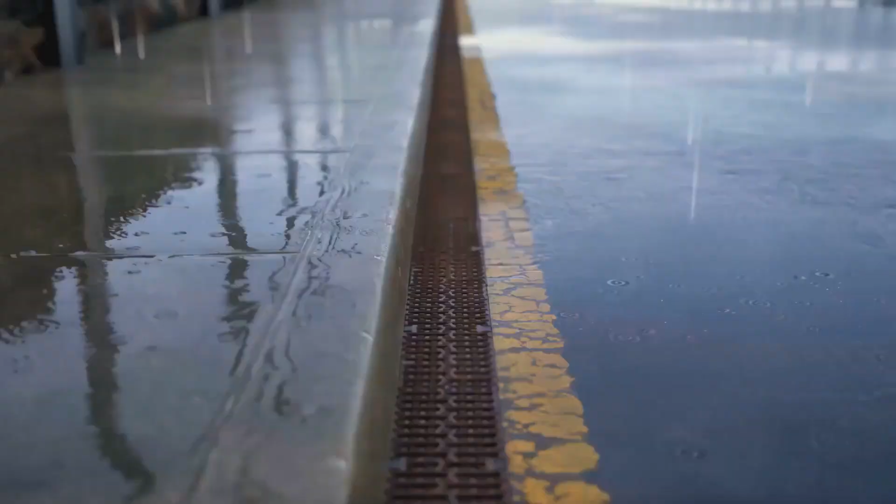The water that rushes across our urban landscapes carries a hidden burden of pollutants, degrading precious aquatic ecosystems. We have spent centuries sealing the ground beneath our feet. Concrete and paving have replaced the soft, porous earth that once absorbed rainwater naturally. This convergence creates a perfect storm. We are faced with a future where flash floods become a common feature of urban life.

It's a stark picture, but it is also a powerful catalyst for change. It forces us to look beyond the concrete and pipes and to seek out smarter, more harmonious ways of living with water. We now need a fundamental rethink of how we design, build and manage our cities from the ground up. Facing immense stormwater challenges, a new philosophy is emerging: sustainable drainage systems, or SuDS. SuDS treats rainfall as a valuable resource, managing it close to where it falls.

At its core, SuDS mimics nature's processes. SuDS applies these principles to our built environments using techniques like green roofs and permeable pavements. This reduces flood risk and improves water quality. SuDS transforms drainage into a visible, multifunctional asset. It enhances our surroundings, making our urban centers more pleasant. SuDS is a flexible toolkit tailored to the specific needs of any location.

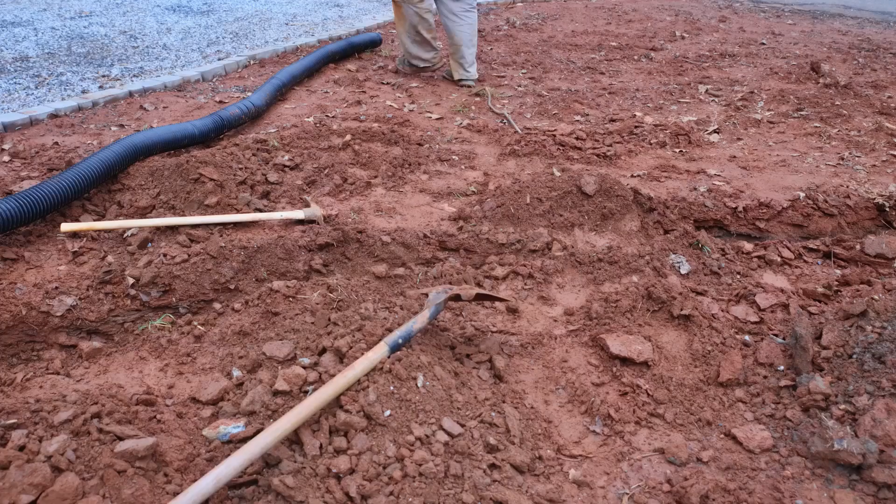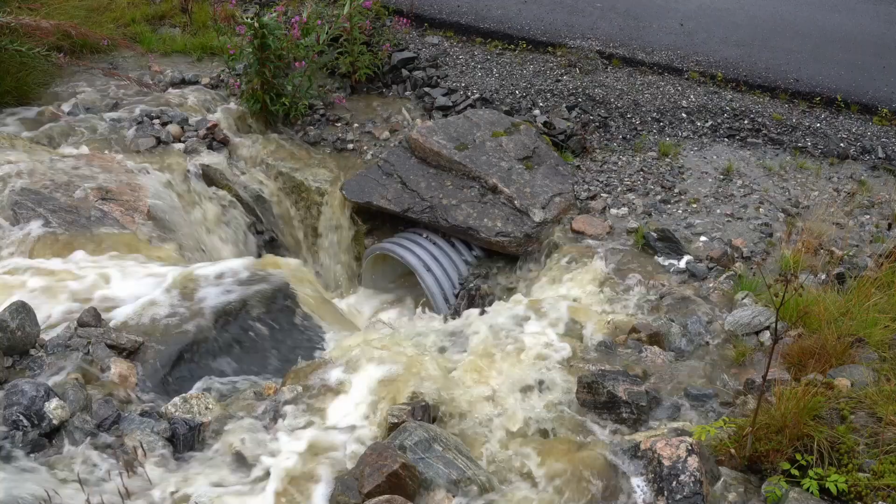This video will explore the fundamental concepts that underpin SuDS. This video is designed to be a definitive resource, taking you from the core principles of SuDS right through to the practical realities of putting them into the ground. Our journey will be structured and thorough, ensuring you gain a complete understanding of this vital subject. We will begin by delving deeper into the problems with our traditional pipe-based drainage systems, highlighting exactly why they are failing us in the 21st century.

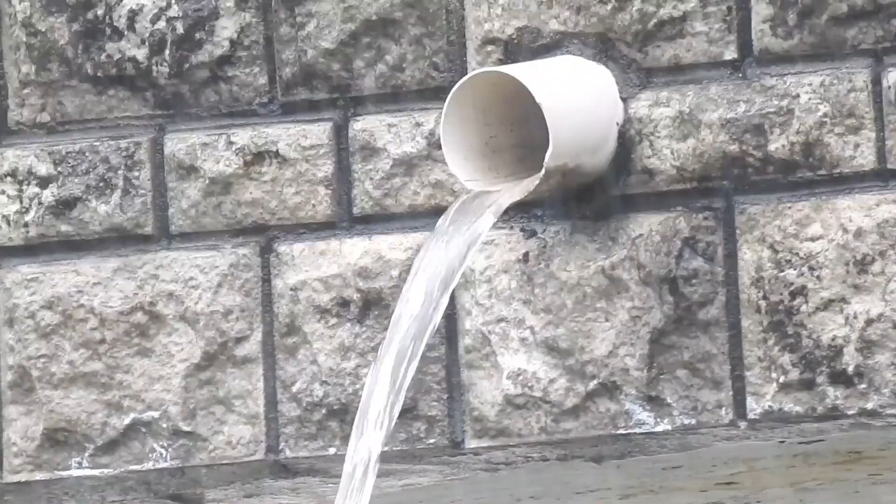We will then formally define what SuDS are, exploring the key goals of slowing the flow, improving water quality, and enhancing the urban environment. This foundational knowledge is crucial for appreciating the elegance and effectiveness of the solutions that follow. From there, we will embark on a detailed exploration of the individual components that make up a SuDS network.

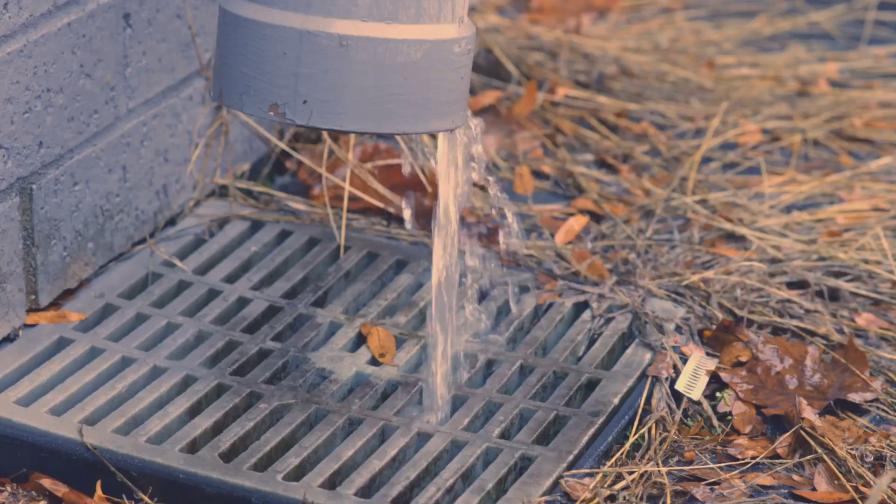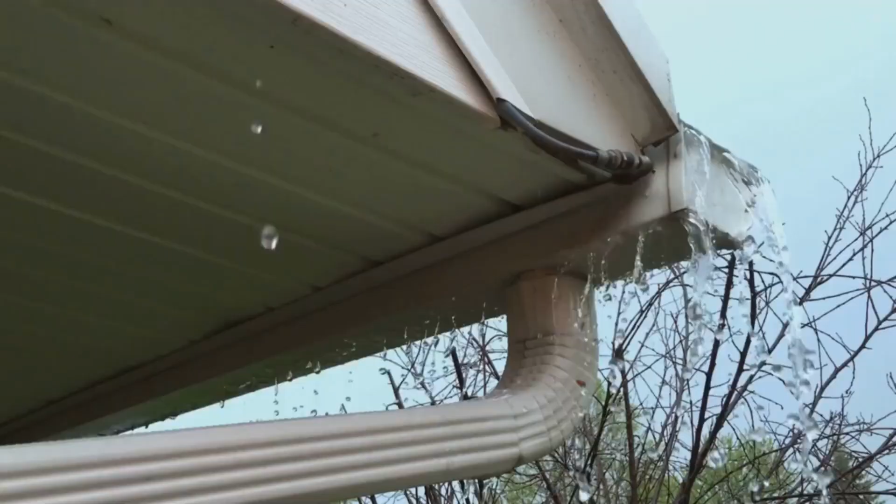You will become familiar with the clever design of permeable pavements that allow water to soak through, the gentle vegetated channels known as swales, and the beautiful hard-working rain gardens that can turn a street corner into a miniature wetland. We will also look at larger features like detention basins and the vital role of green roofs in managing rainfall right at the source. For each component, we will examine how it works, where it is best used, and what it looks like in the real world, providing you with a complete visual and technical vocabulary.

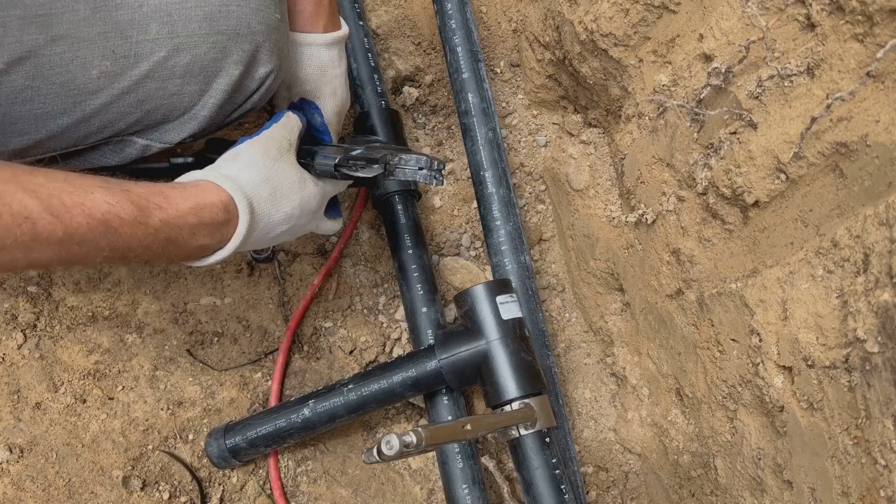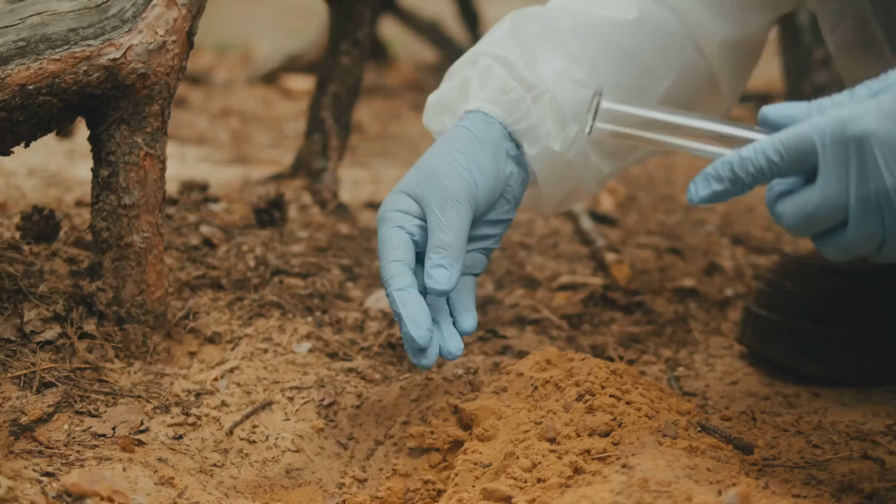Of course, a great idea is only as good as its execution. That is why we will dedicate significant time to the critical aspects of design and construction. Good design requires a deep understanding of the site, from its soil type and topography to its rainfall patterns. We will discuss the key considerations that engineers and designers must weigh, including the powerful software tools they use to model and predict how a SuDS scheme will perform.

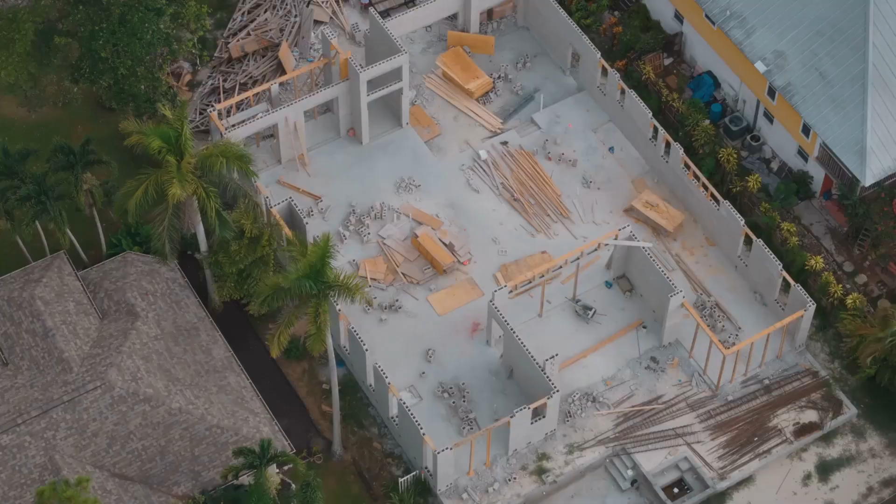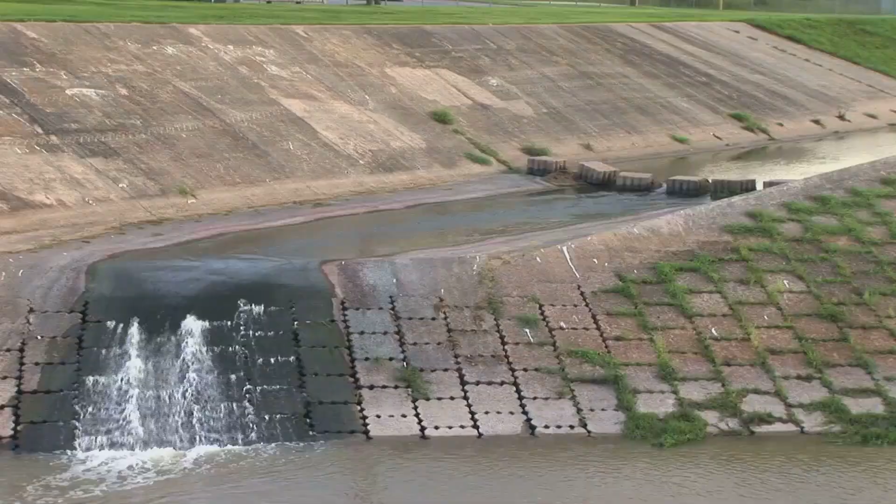Following design, we will walk you through the best practices for construction, offering step-by-step guidance to ensure these systems are built correctly, function effectively, and stand the test of time. Finally, we will bring everything together by looking at real-world examples and the tangible benefits they deliver. We will analyze the costs and long-term value of SuDS, demonstrating how the initial investment pays dividends in flood protection, environmental health, and community well-being.

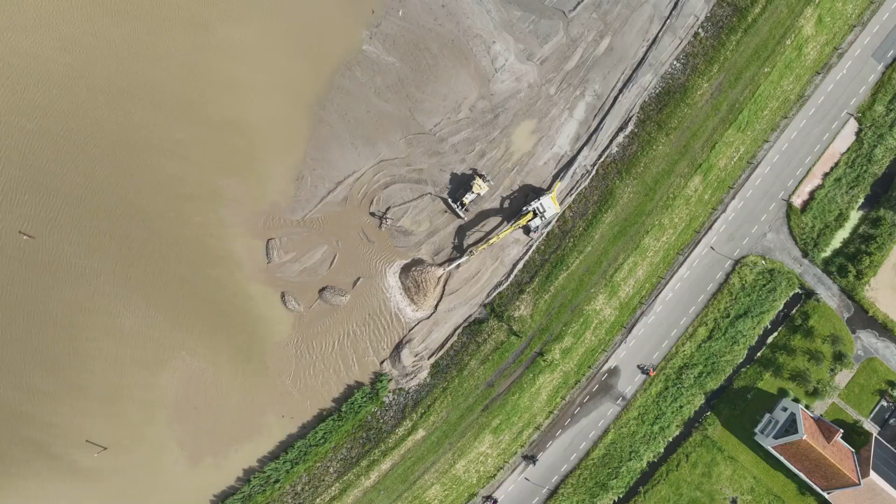We will also cover the essential, though often overlooked, topic of maintenance to ensure longevity. Through inspiring international case studies, you will see how cities around the globe are successfully implementing SuDS to create more resilient, sustainable, and beautiful places to live. So, if you are ready to explore the future of urban water management, let's begin.

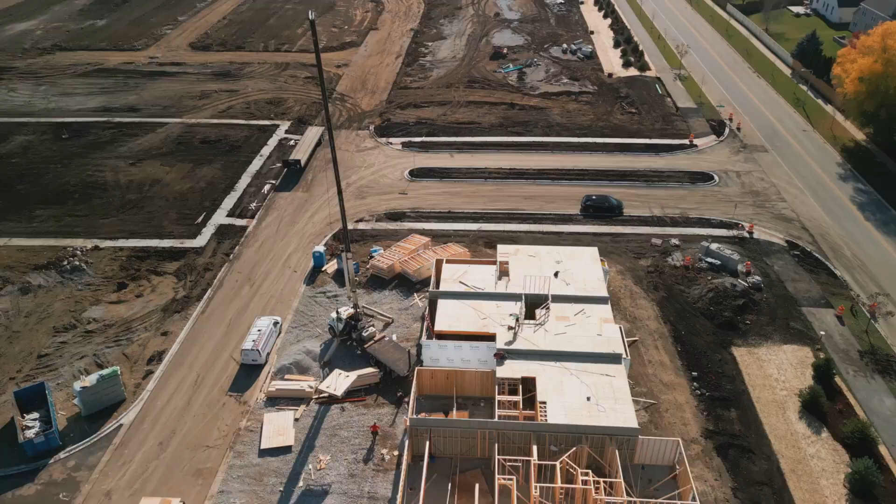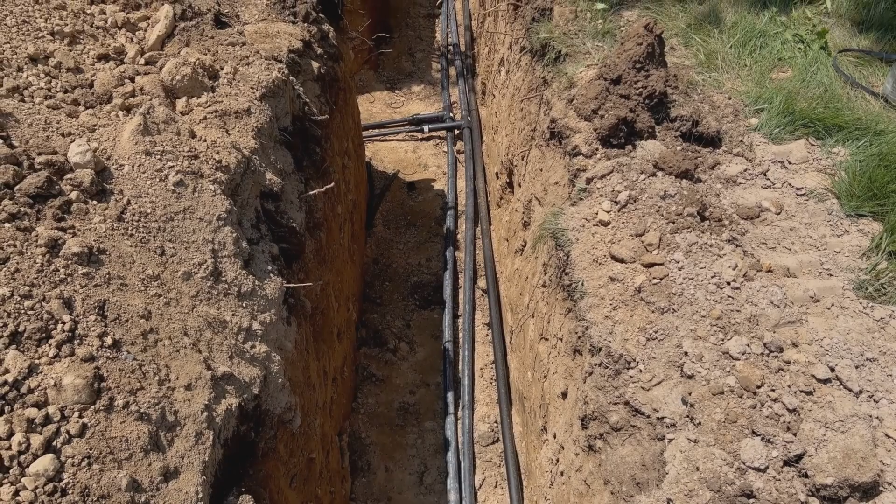For over a century, urban rainwater management has been governed by a single principle: get rid of it as quickly as possible. This flush and forget philosophy was born in an era of rapid industrialization. The primary goal was public health, to prevent streets from turning into quagmires. Engineers developed vast networks of underground pipes designed to capture every last drop of rain. It was a triumphant feat of civil engineering. This system is built on the idea of collection and conveyance.

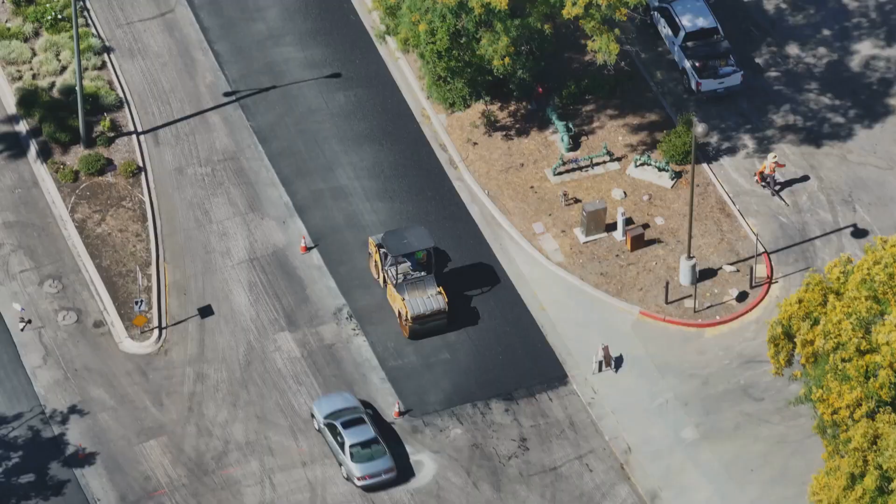This approach treated rainwater as a waste product rather than as a natural part of the local environment. This created a profound disconnect between our urban spaces and the natural water cycle. We paved over the very soil that once absorbed the rain. However, we are now beginning to understand the severe and unintended consequences that this focus has created.

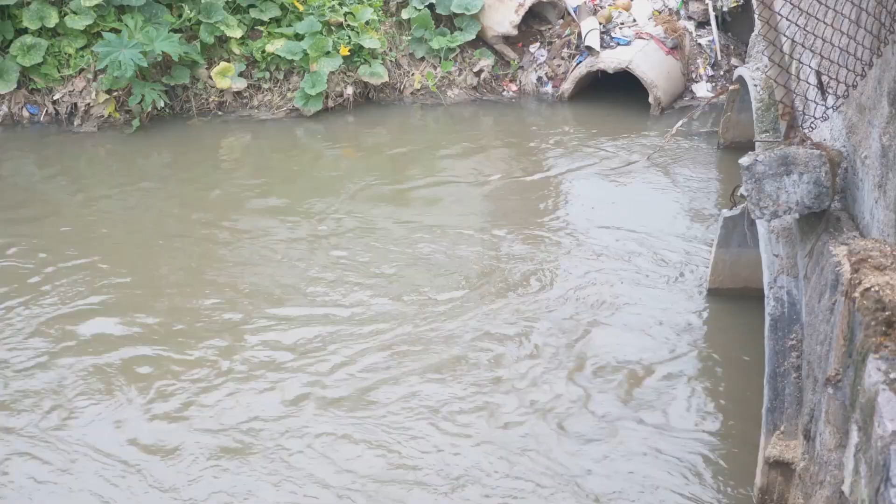Conventional drainage, while efficient, can harm the environment. Rainwater becomes a chemical sponge, collecting pollutants. This polluted runoff is channeled into waterways, often untreated. The first flush delivers a high concentration of pollutants, harming aquatic life.

The sheer volume of water causes physical damage, eroding riverbanks. By preventing rainwater from soaking into the ground, we starve our aquifers. Drainage systems create floods and contribute to drought, disrupting the water cycle.

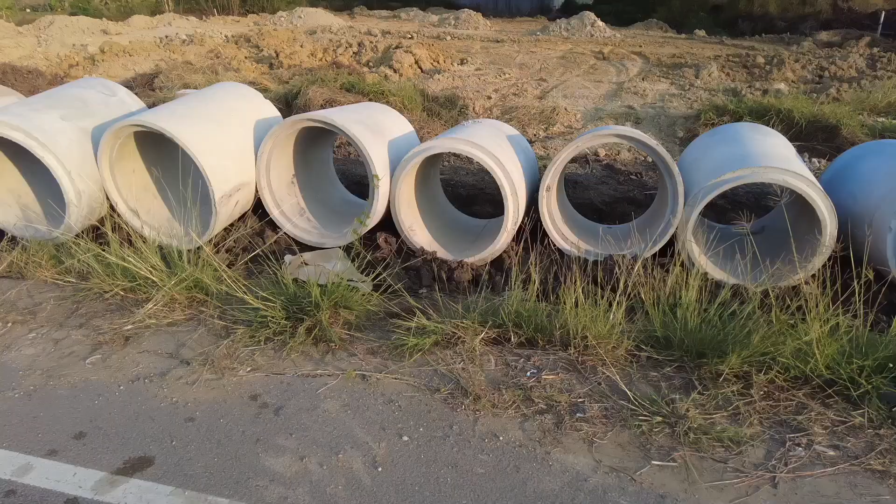Conventional drainage networks are now facing a challenge they were never designed to handle: climate change. We are witnessing an increase in extreme rainfall events. These downpours overwhelm the underground pipe network. The system fails, leading to street flooding. Water spills into our homes and businesses. This is a direct result of a rigid system being pushed beyond its breaking point.

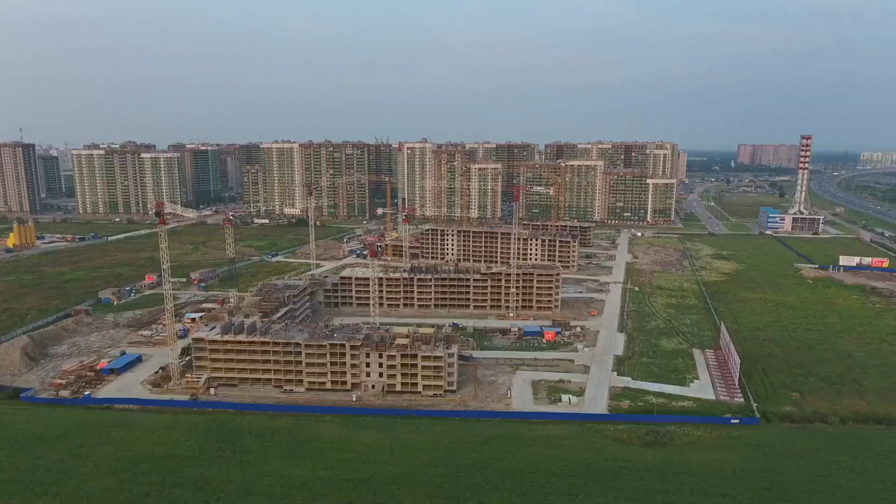Urban expansion worsens the problem with more impermeable surfaces. Combined sewer overflows discharge untreated sewage into rivers, causing pollution. The traditional drainage model lacks resilience. We need a new, adaptable approach that works with nature.

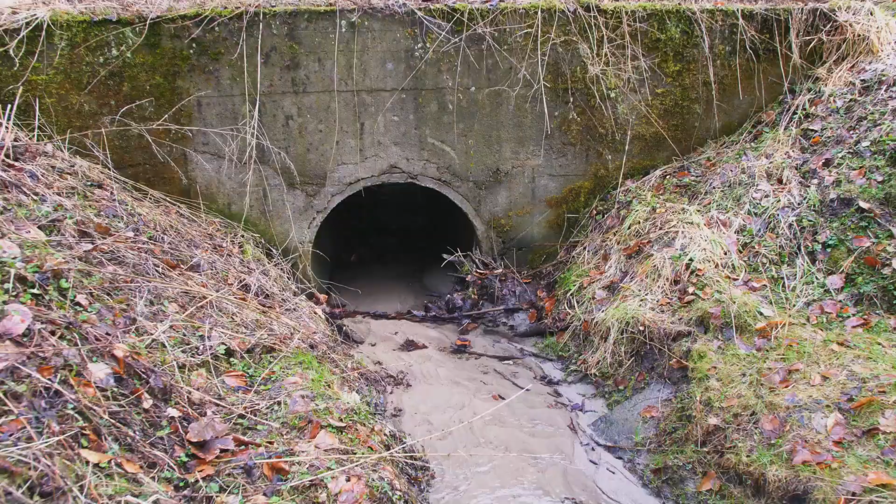Sustainable drainage systems, or SuDS, offer a fundamentally different way of thinking about rainwater in built-up areas, treating it as a valuable resource to be managed rather than a waste product to be disposed of. SuDS aims to slow it down, store it, clean it, and allow it to be absorbed back into the environment, mimicking the natural water cycle.

SuDS applies these principles using a toolkit of specially designed features. Even the roof of a building can be transformed into a living green roof that acts like a sponge. SuDS is about moving drainage to being a visible, integrated and multifunctional part of the landscape, creating urban spaces that are also more attractive, biodiverse and enjoyable places for people.

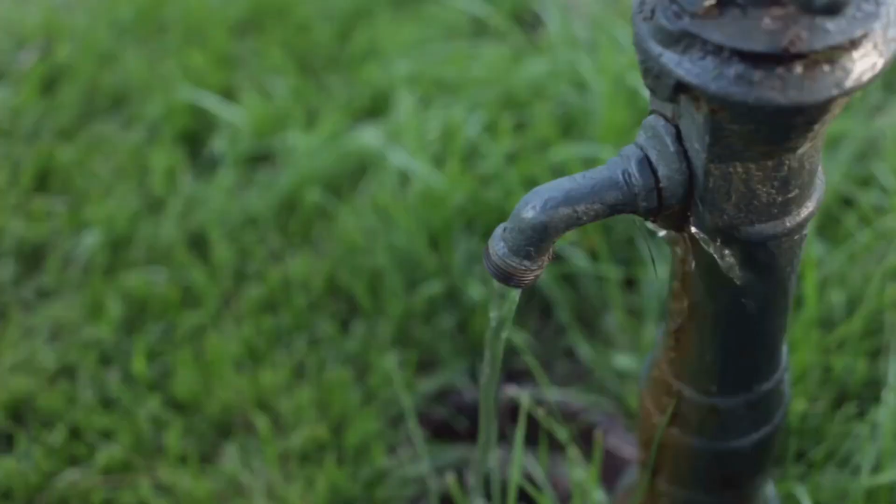The SuDS philosophy is brought to life through 4 key objectives, often referred to as the 4 pillars. Managing water quantities slows the flow to prevent flooding. Improving water quality filters pollutants through soil and vegetation. Providing amenity creates valuable public spaces. Enhancing biodiversity creates green spaces and habitats for wildlife, making our cities richer and more ecologically resilient.

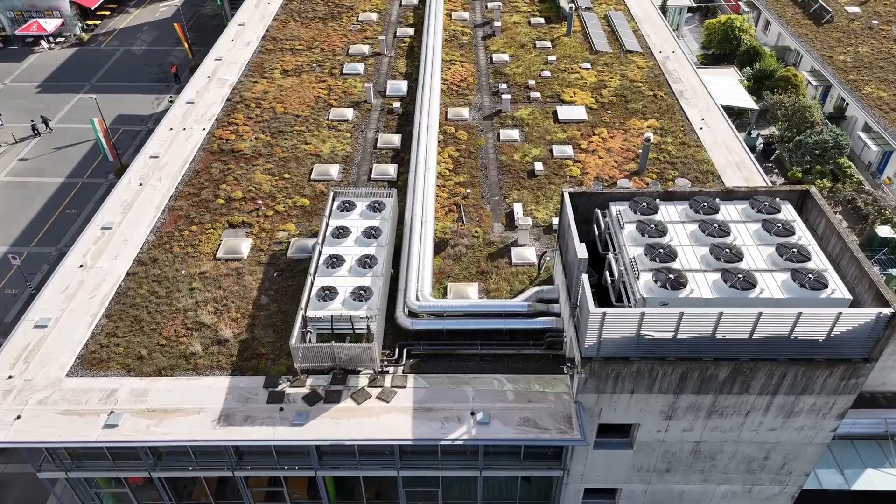When the 4 pillars of SuDS, quantity, quality, amenity and biodiversity, are successfully integrated into a design, the result is far more than just an effective drainage system. It becomes a catalyst for creating better places. A street is no longer just a corridor for traffic.

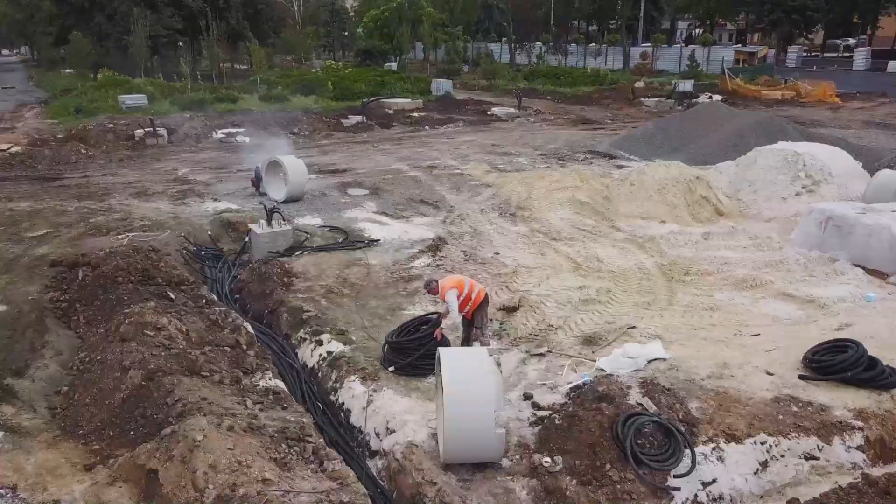It can be lined with bio-retention planters that manage runoff while also calming traffic, greening the view, and providing a habitat for pollinating insects. This multifunctional approach means that the investment in drainage infrastructure delivers returns across many different areas, from environmental health to social well-being and economic value. It is a truly holistic way of thinking about urban design.

This approach fundamentally changes the character of our built environment. Instead of grey, sterile landscapes dominated by impermeable concrete and asphalt, SuDS helps to weave a network of green and blue spaces through the urban fabric. These features introduce the textures, colours and sounds of nature into our daily lives.

The presence of water, whether in a beautifully planted rain garden or a permanent retention pond, has a proven calming effect on people. These spaces become natural focal points for communities, places where children can learn about nature and neighbours can meet, fostering a stronger sense of place and local pride.

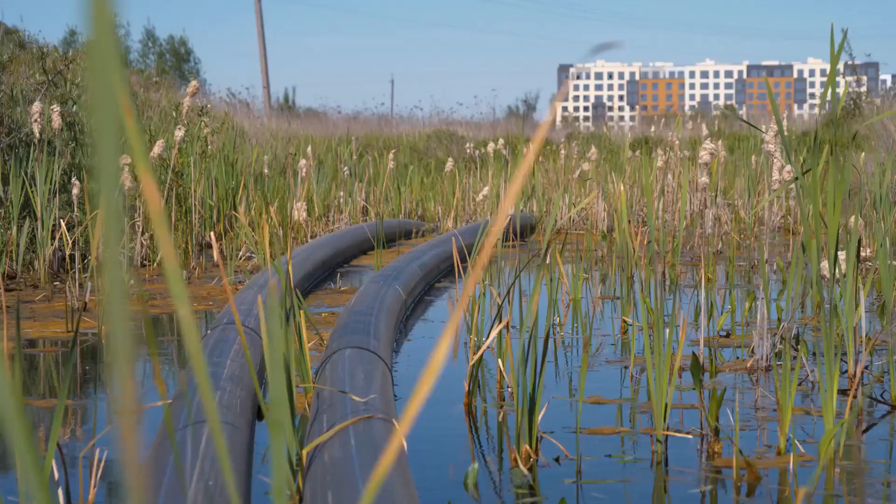Furthermore, embracing SuDS contributes directly to building climate resilience. Beyond managing the intense rainfall events that are becoming more common, the green infrastructure associated with SuDS helps to mitigate other climate impacts. The vegetation and water bodies have a cooling effect, reducing the urban heat island phenomenon that can make cities uncomfortably hot in summer.

The plants absorb carbon dioxide and filter air pollutants, improving local air quality. By replenishing groundwater levels, SuDS can also help to make communities less vulnerable to periods of drought. It is a forward-thinking strategy that prepares our cities for the environmental challenges of the future.

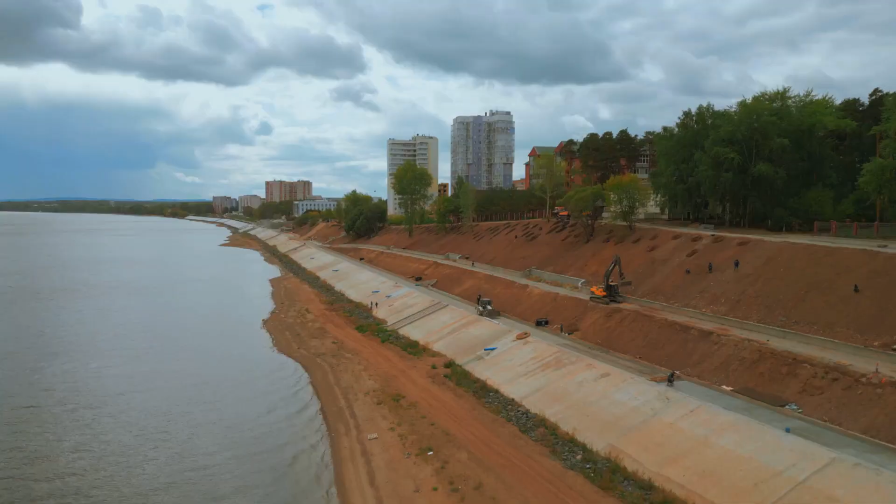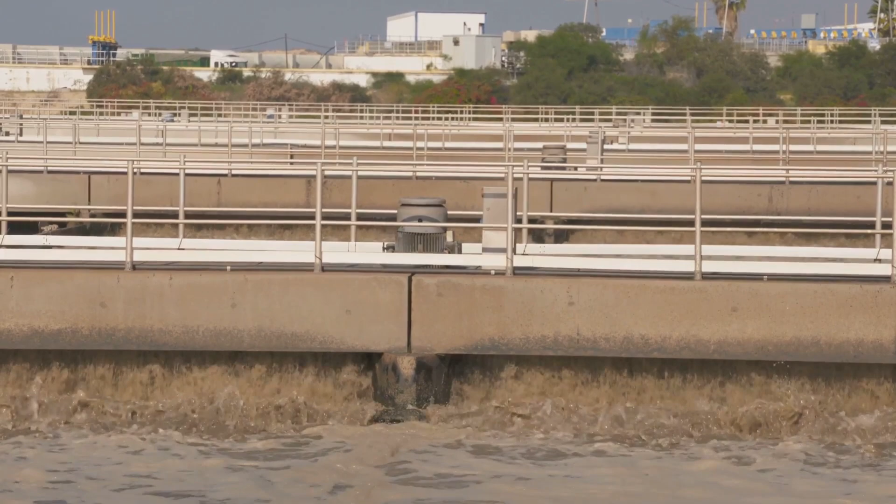In essence, sustainable drainage systems are a powerful tool for regenerative design. They don't just solve the problem of runoff, they actively improve the places where they are implemented. They take a liability, excess stormwater, and turn it into an asset that can be used to create ecological value, social amenity, and beautiful landscapes.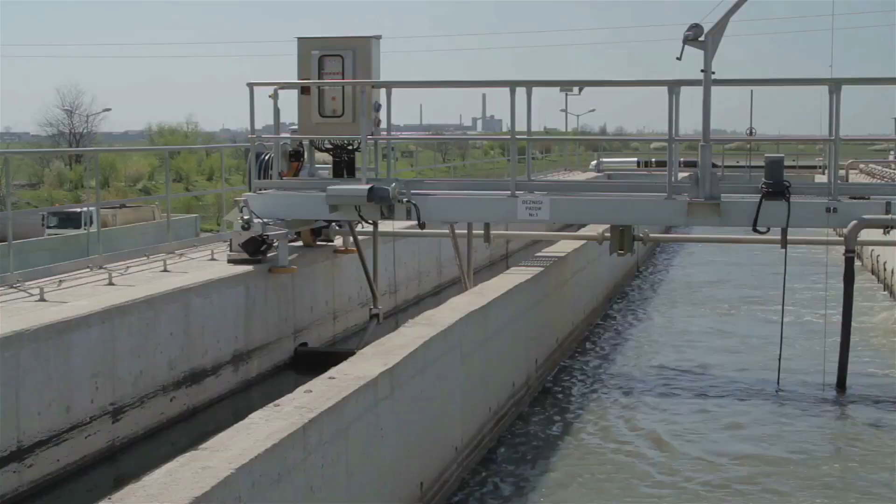This is why SuDS is now being championed by planners, architects, and engineers around the world. It marks a move away from the single-purpose utilitarian infrastructure of the past towards a more intelligent, integrated and life-enhancing approach to building the cities of tomorrow. It is engineering in service of people and the planet.

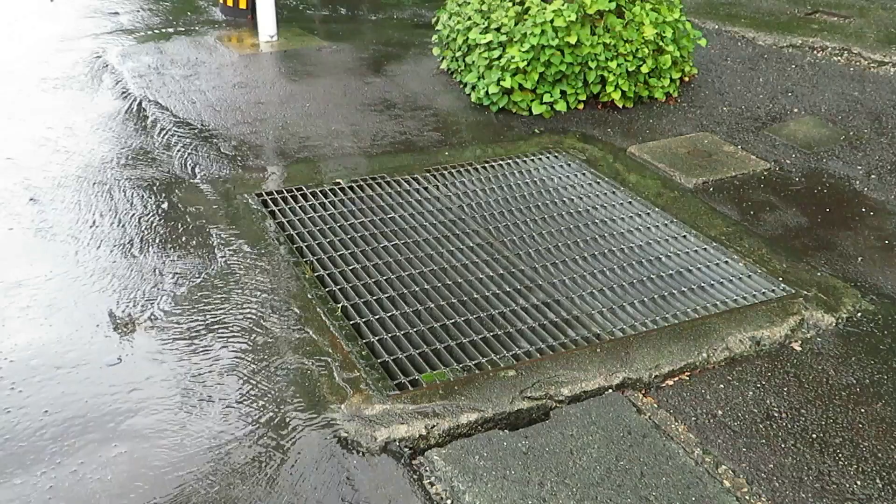The most effective way to manage rainfall is to deal with it the moment it arrives. One revolutionary solution is permeable pavement. Beneath the surface lies a system designed to let water soak straight through, absorbing rainfall like a sponge. The water passes through the top layer into a subbase, an underground reservoir that stores a large volume of water. Another brilliant component is the green roof, transforming a standard roof into a living ecosystem.

When it rains, this system works like a natural meadow. The benefits extend far beyond managing stormwater. They provide excellent insulation, create valuable new habitats, and combat the urban heat island effect. Green roofs deliver environmental, economic, and aesthetic benefits all at once.

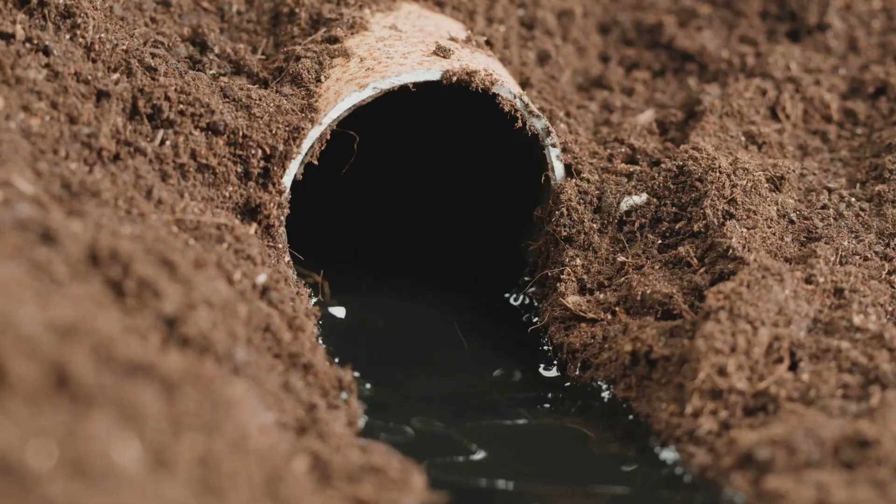Once water leaves the surface, managing its journey is crucial. Instead of speeding it through pipes, sustainable drainage uses swales, broad, shallow, vegetated channels that slow water, filter out debris, and let some soak into the ground. Swales fit naturally into landscapes, adding greenery while quietly cleaning and moving water.

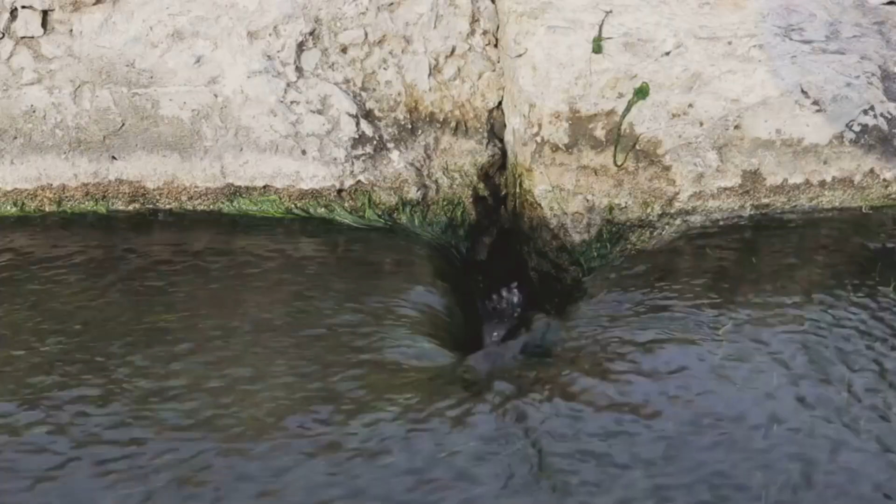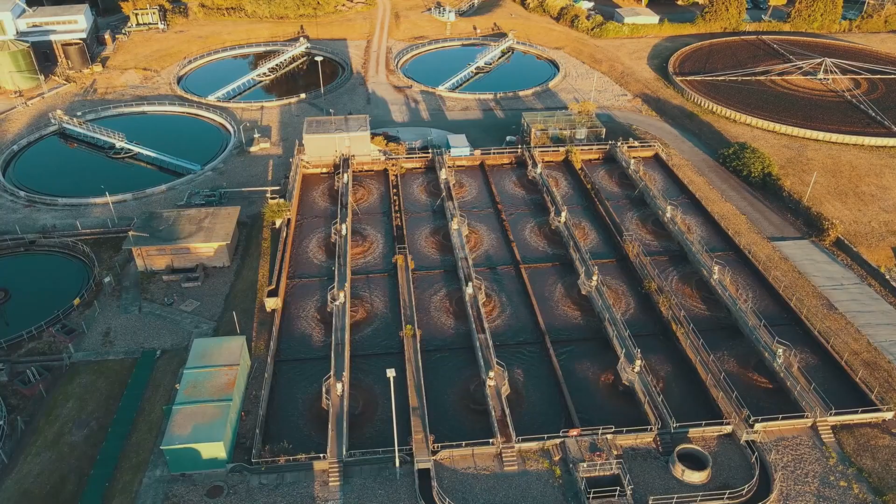For more engineered sites, filter drains, gravel-filled trenches with perforated pipes, intercept runoff, filter silt, and release water slowly. These can be left open or covered with turf, blending into surroundings. Filter drains often connect to other SuDS features, forming a chain that manages and treats water in stages. This approach ensures water is slowed, cleaned, and safely conveyed across a site. Swales and filter drains are essential, versatile tools in sustainable drainage design.

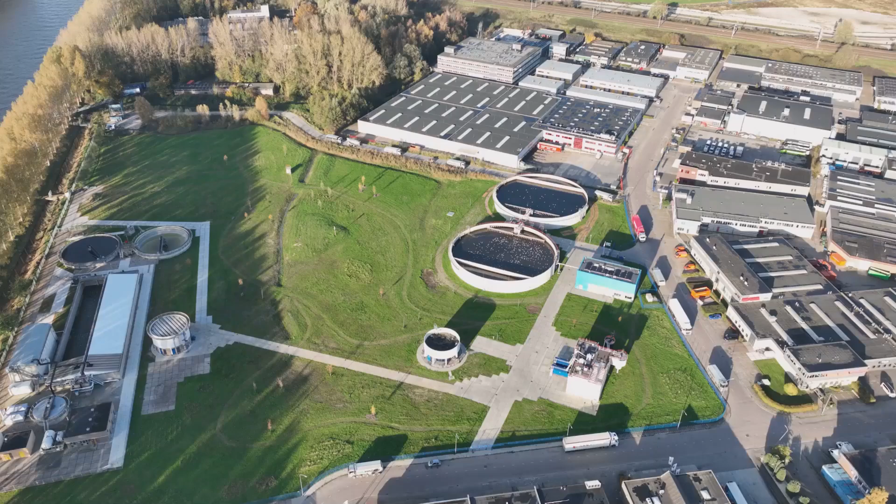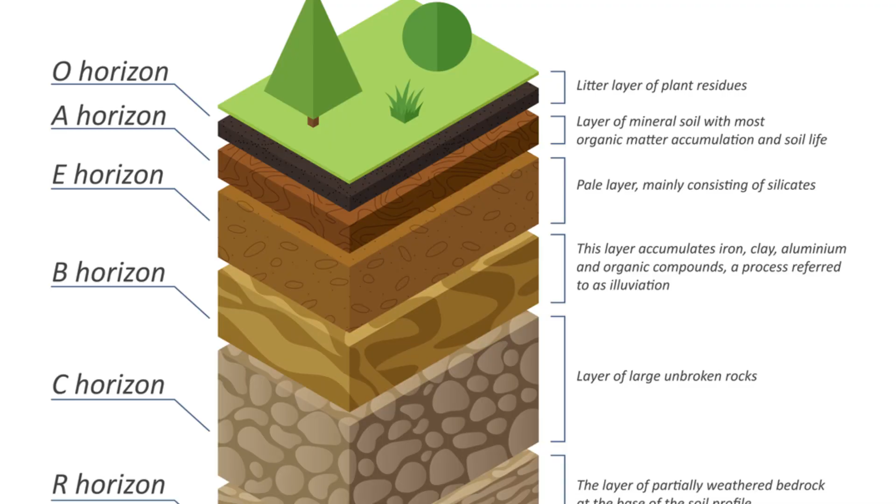Rain gardens collect runoff from roofs and roads in shallow, planted depressions, turning stormwater management into a beautiful, wildlife-friendly feature. Beneath the surface, layers of gravel, sand, and soil filter and clean the water as it soaks in. Microbes in the soil break down pollutants, providing high-level treatment. Larger engineered versions, bioretention cells, are used in commercial areas, offering both water storage and advanced filtration.

These systems reduce flood risk, protect rivers, and boost biodiversity, all while enhancing urban spaces. From small planters to large installations, rain gardens and bioretention cells are adaptable, effective, and visually appealing. They exemplify the multifunctionality of sustainable drainage.

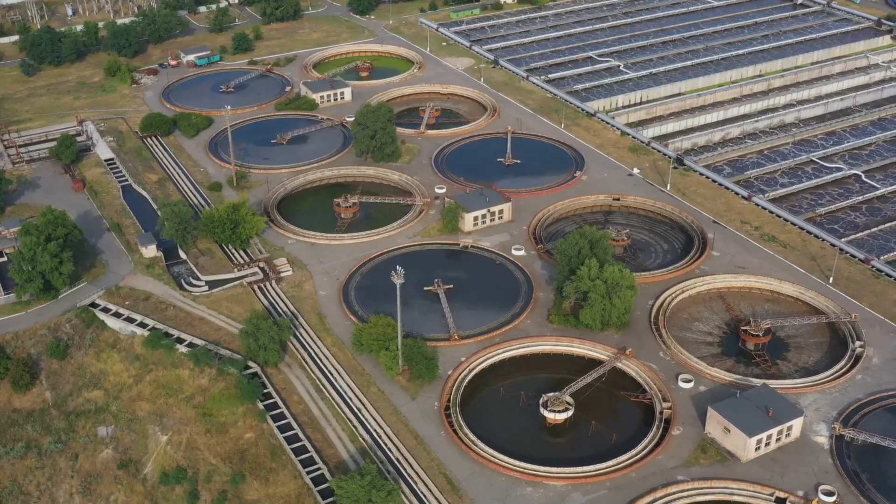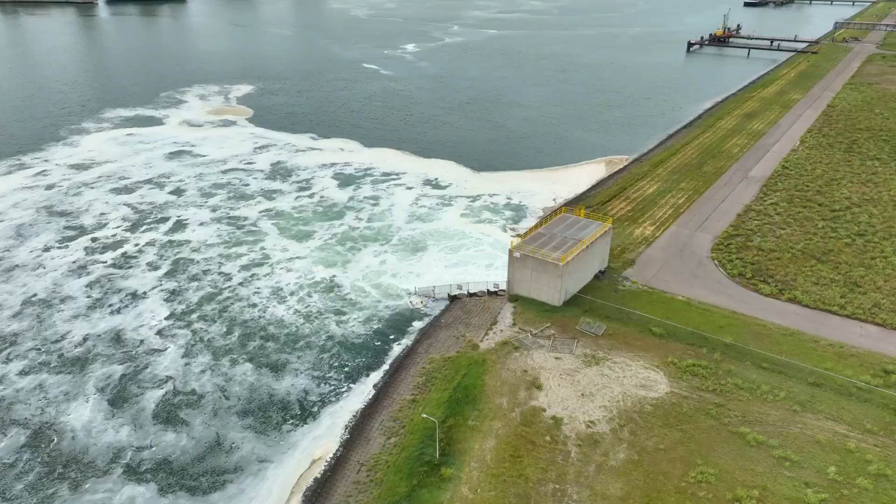For large catchments, basins and ponds provide essential stormwater storage. Detention basins are dry depressions that fill during storms, releasing water slowly to prevent downstream flooding. Retention ponds hold a permanent pool, creating wetland habitats and community amenities.

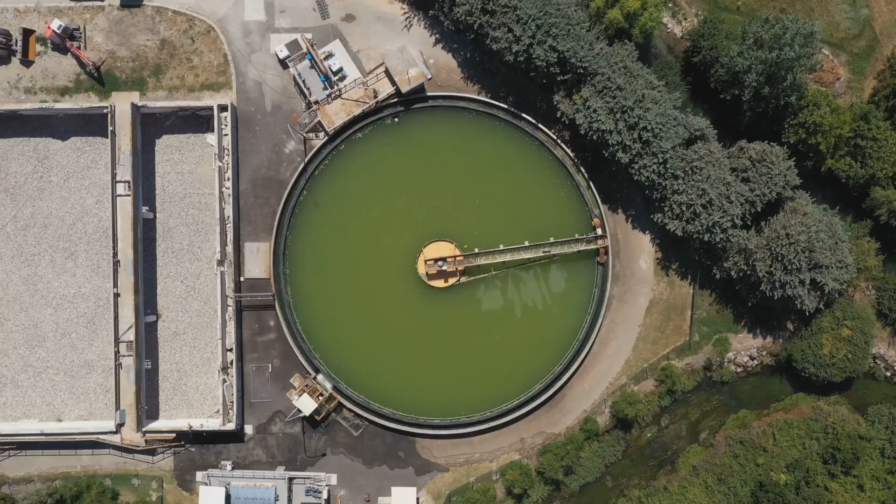Both types improve water quality by allowing sediments and pollutants to settle out. Retention ponds add further treatment through natural biological processes. These features often form the final stage in a SuDS network, ensuring water is released slowly and cleanly. Basins and ponds combine flood protection, water treatment, and ecological value.

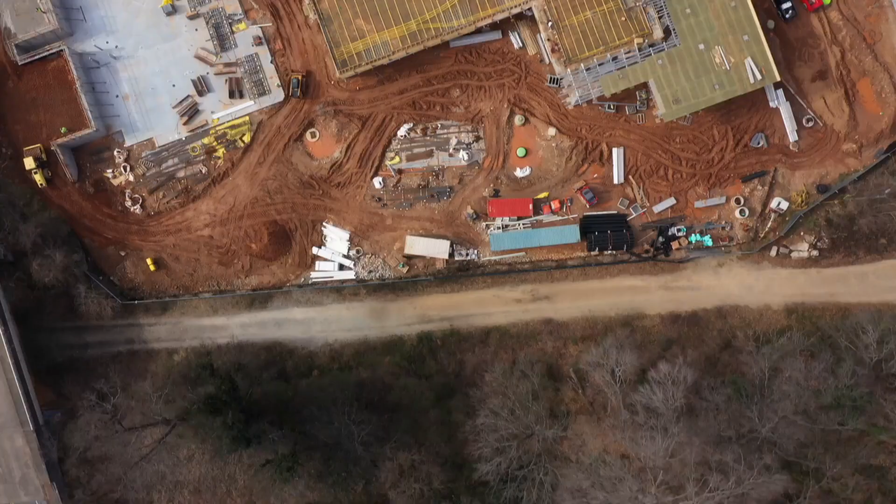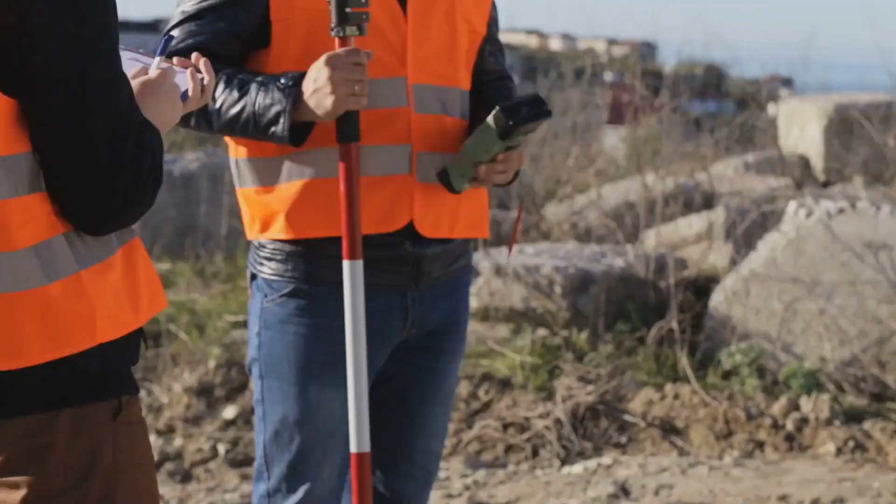Effective SuDS design starts with understanding the site, its soils, slopes, and constraints. Infiltration tests reveal how well the ground drains, guiding the choice of drainage features. Topographical surveys map natural flow paths and identify suitable locations for basins or swales. Designers must also consider buildings, utilities, and the water table to avoid costly mistakes.

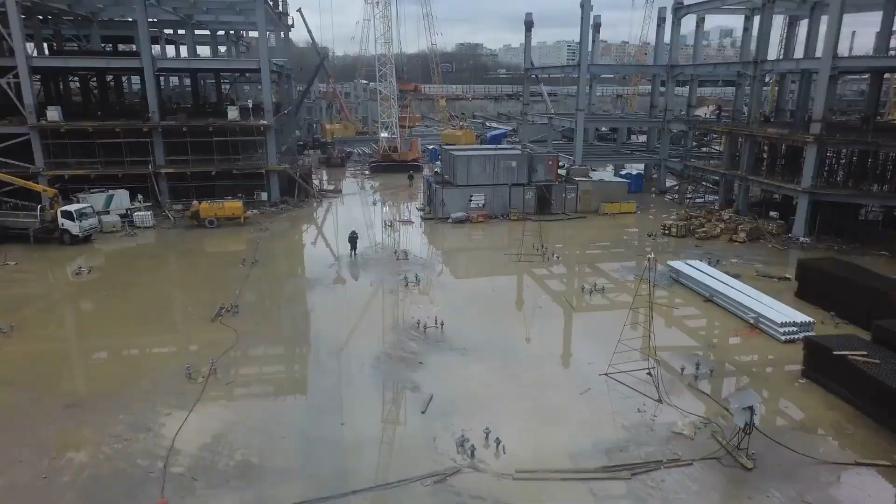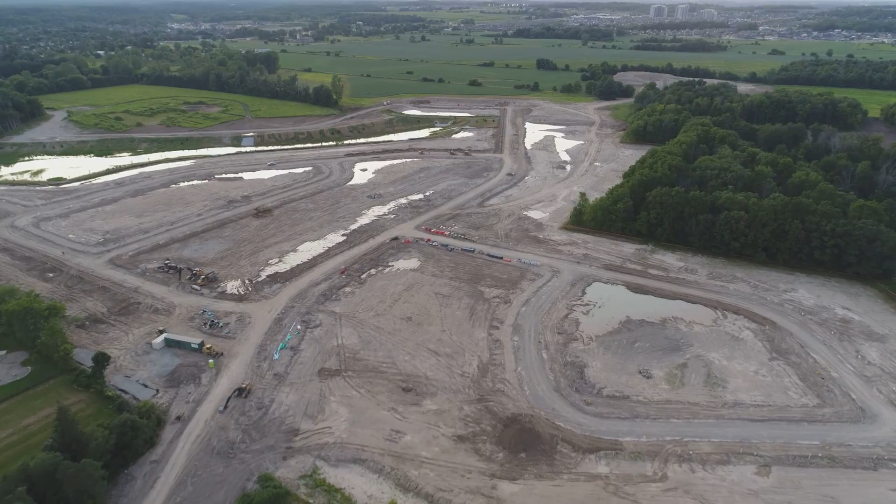Working with the land's natural contours leads to efficient, resilient solutions. Early identification of constraints shapes a successful design. Careful site analysis is the foundation of every robust SuDS scheme.

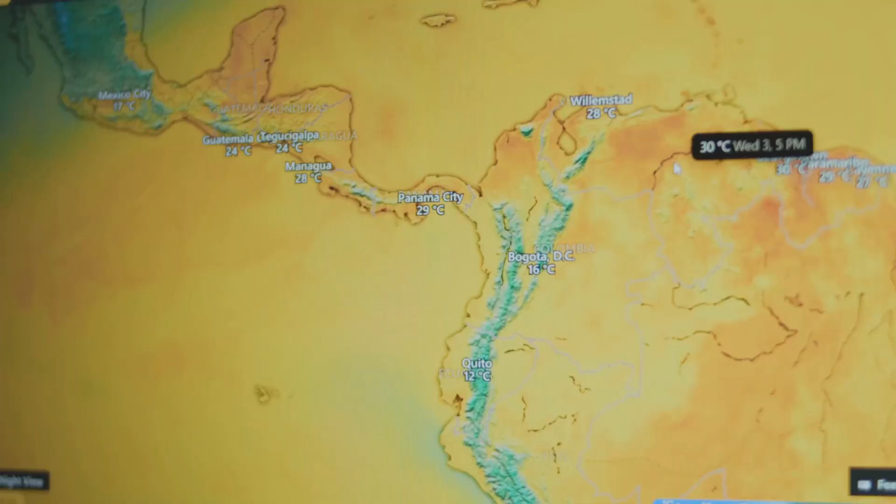With the site understood, designers calculate how much water the system must handle and how fast it will arrive. They define catchment areas, use local rainfall data, and factor in climate change to size SuDS components accurately. Software models simulate storms, testing if the system can store and release water at safe rates. The process is iterative. Designs are refined until storage and flow targets are met.

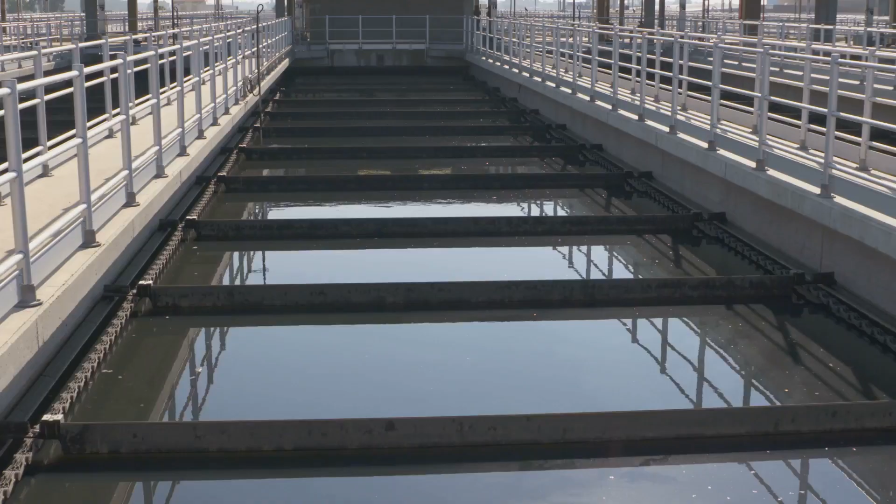Balancing hydrology, site constraints, and budget ensures a robust solution. Rigorous calculations guarantee the system performs during real storms. This engineering underpins the reliability of sustainable drainage.

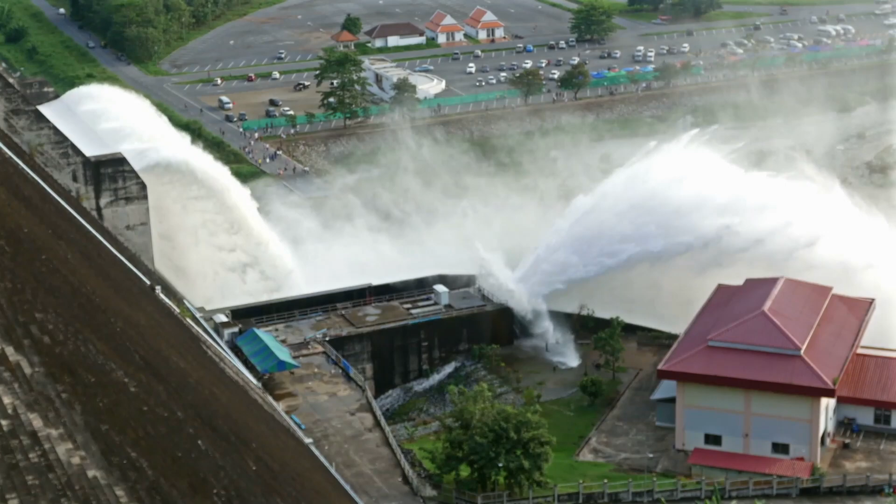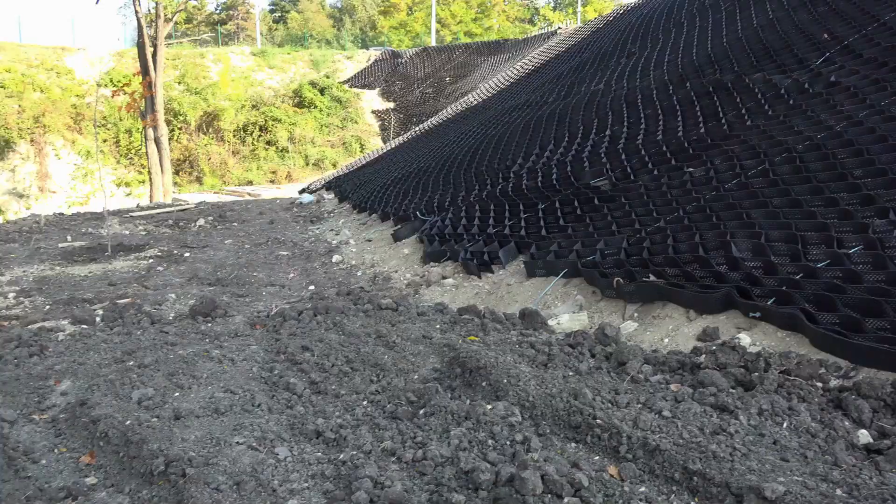A strong SuDS scheme links multiple components in a management train, treating water in stages from source to outlet. Source control features like green roofs and permeable pavements manage water where it falls. Conveyance elements, swales and filter drains, move and clean water across the site. Site control features such as bioretention areas and basins provide main storage and advanced treatment.

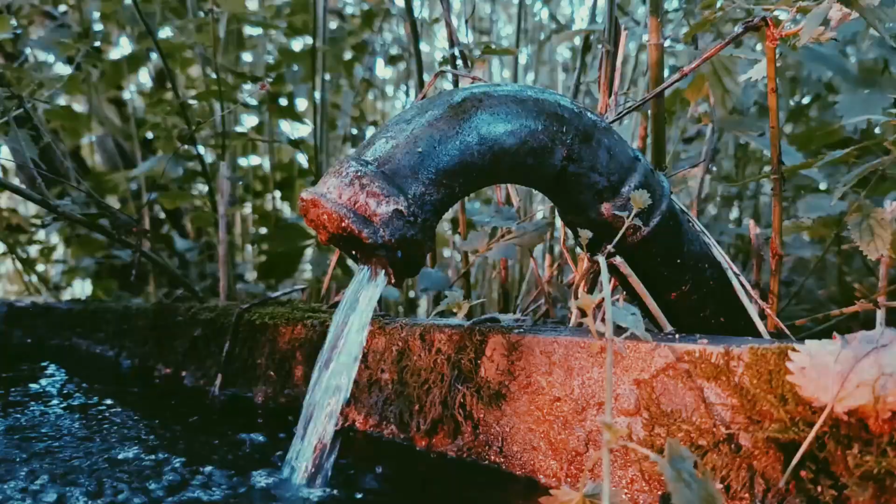Finally, water is released slowly and cleanly to the environment. Each component plays a role, and together they create a resilient, integrated system. This multi-stage approach protects communities and the environment, even in extreme weather.

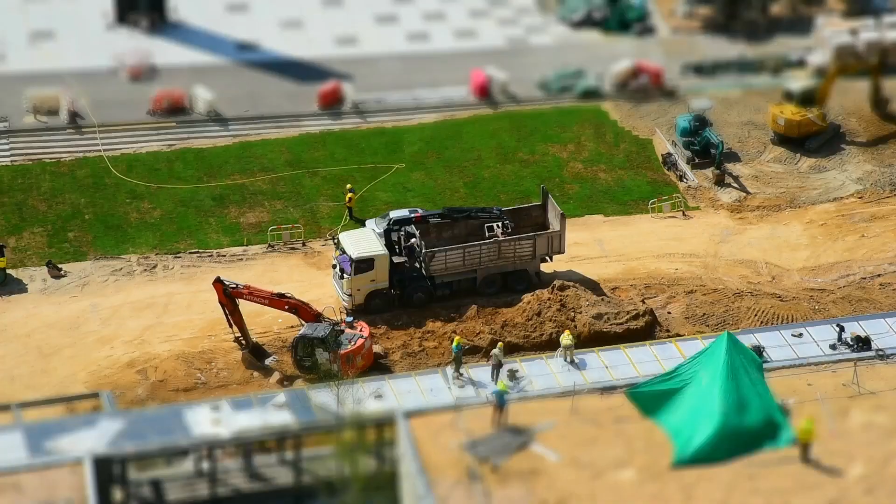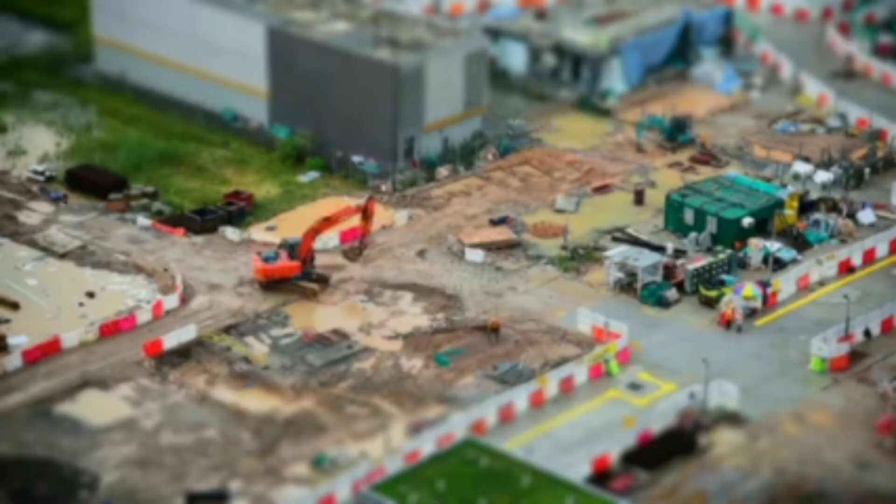A sustainable drainage system will fail if not built correctly. The construction phase hinges on careful planning and respect for the landscape. The first step is a rigorous site management plan, especially critical for SuDS. Uncontrolled construction traffic can severely compact the ground, rendering the design useless. Protecting sensitive areas is priority number one, with designated infiltration zones clearly marked and fenced off.

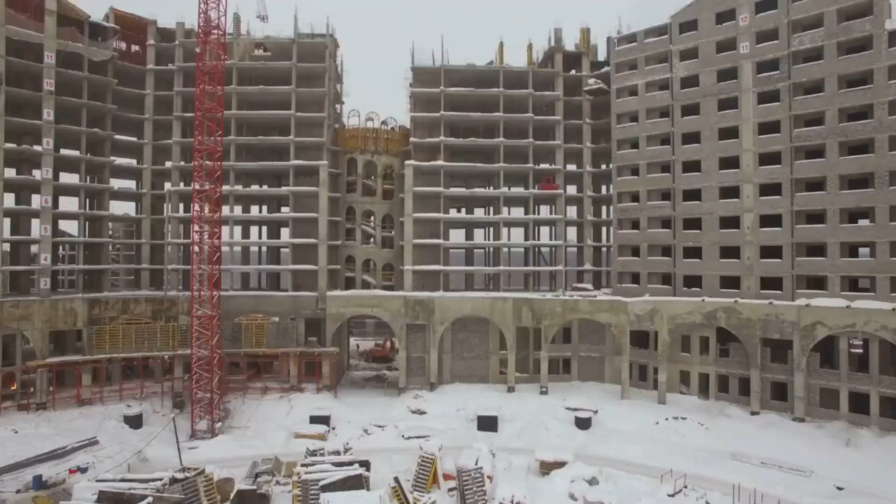Managing water during construction is critical. Runoff laden with silt can clog SuDS features. Divert runoff away from SuDS locations using bunds or silt fences. Timing of SuDS installation is a key consideration. Avoid installation during heavy rain or when the ground is frozen. This careful management sets the stage for a successful build.

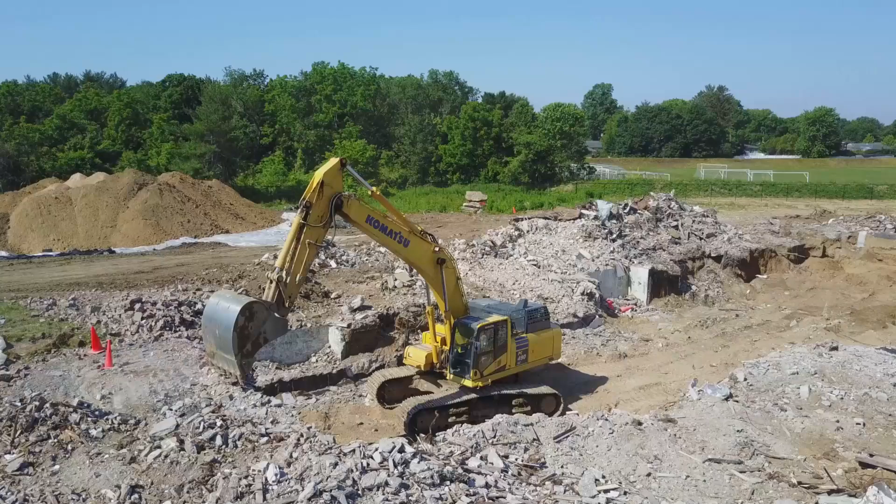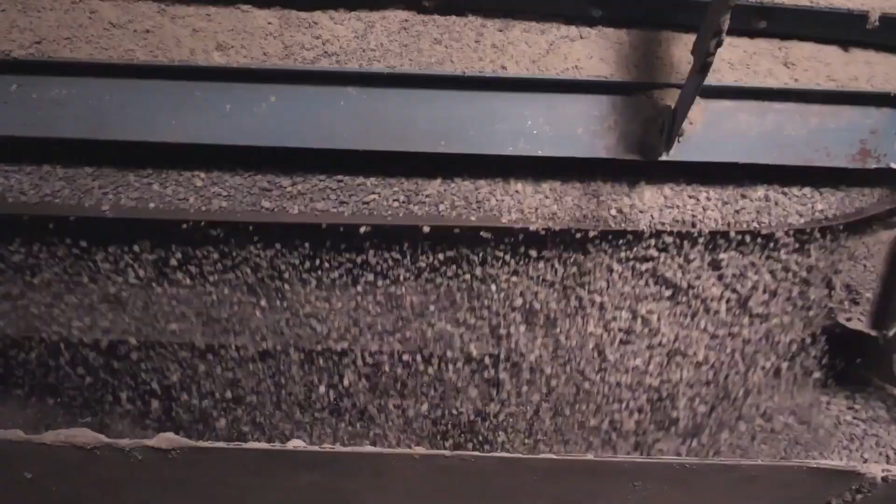With proper site preparation, SuDS construction can begin methodically. Excavation is the first step for features like rain gardens. Carefully lay down the different layers. Each layer must be placed gently. For permeable paving, lay the geotextile membrane carefully. The quality and cleanliness of materials are paramount.

Finally, introduce vegetation, a critical functional component. Select native species suited to the local climate. Following these practices ensures a robust SuDS feature ready to perform for decades. A key question when considering sustainable drainage systems is the cost.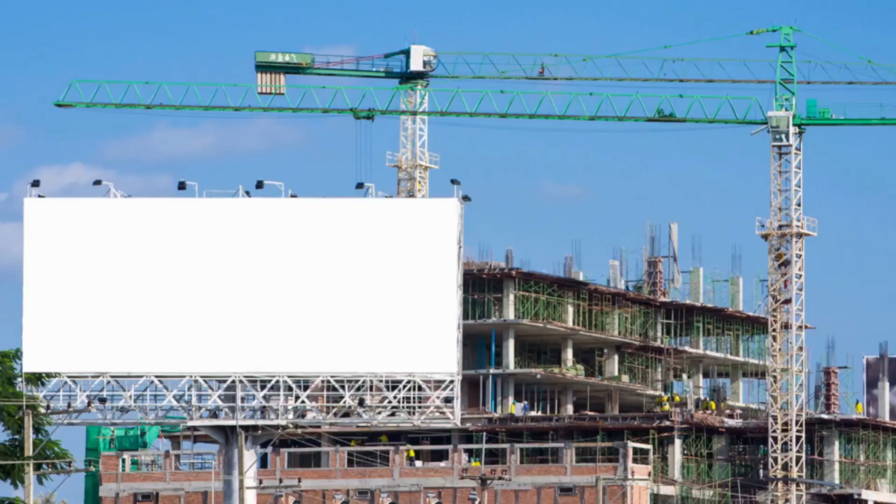It's often thought that green solutions are more expensive than traditional drainage. However, a well-designed SuDS scheme can be similarly priced, or even cheaper. Savings come from reduced infrastructure needs. Plus, SuDS use fewer materials that are becoming expensive.

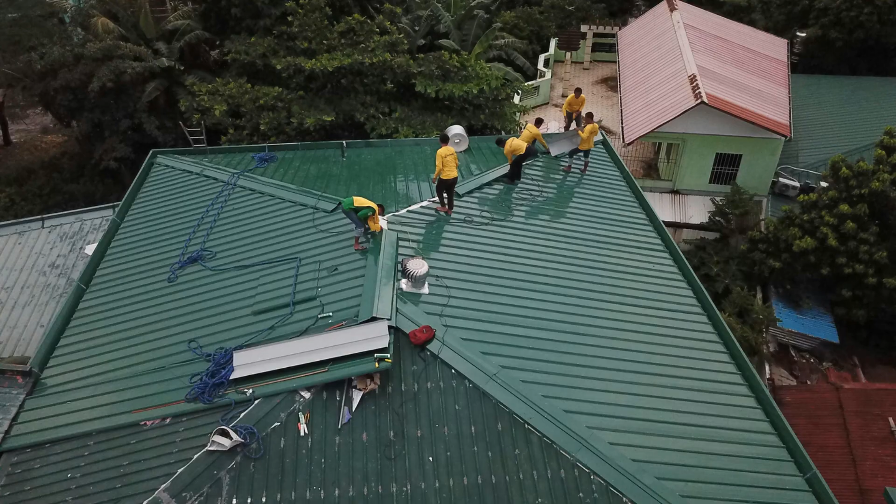SuDS cost-effectiveness lies in its multifunctional design. Look at the whole life cost of the system. Long-term maintenance is typically less expensive. Investing in SuDS promises lower long-term liabilities.

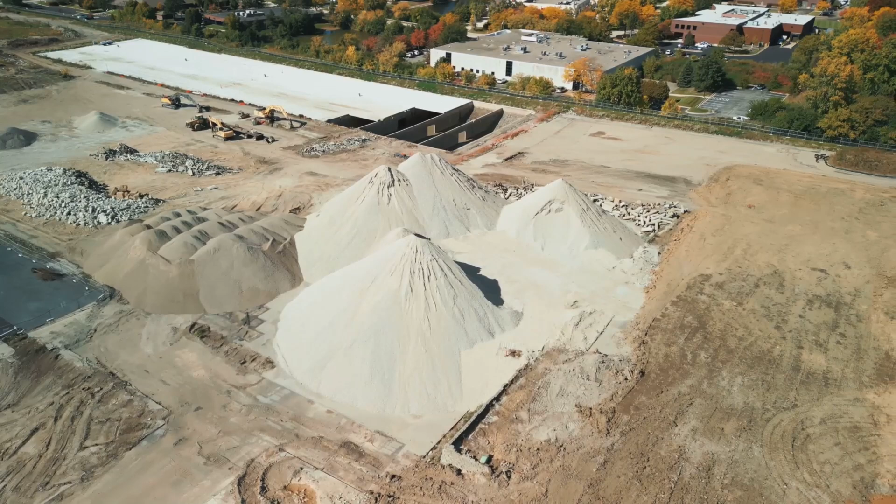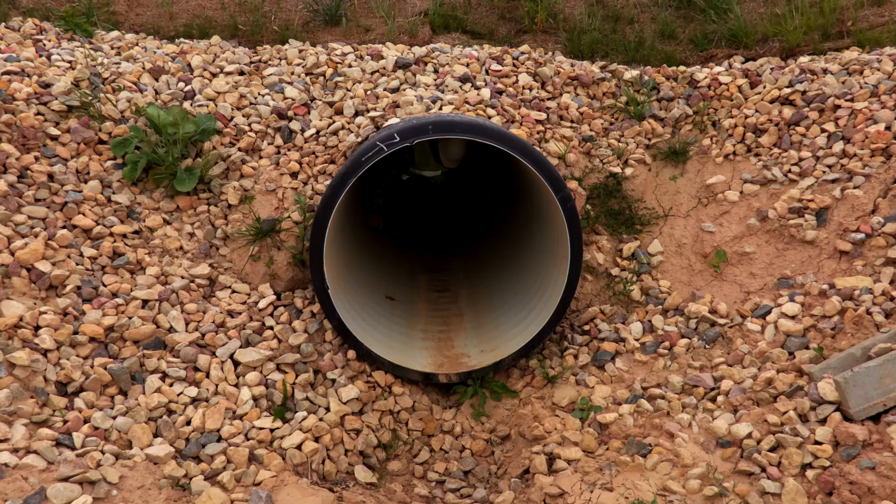While the direct cost comparisons are often favorable, the true value of sustainable drainage systems really extends far beyond the numbers you see on a construction invoice. The benefits they deliver are honestly wide-ranging, touching on environmental health, social well-being, and economic resilience in ways that a simple pipe in the ground just never could.

The most obvious and quantifiable benefit is flood risk reduction. Every time a SuDS scheme successfully prevents homes from flooding or roads from becoming impassable, it saves communities and insurers vast sums of money in damage repairs and economic disruption. This risk reduction is a tangible financial return on the initial investment, almost like an insurance policy written into the landscape itself.

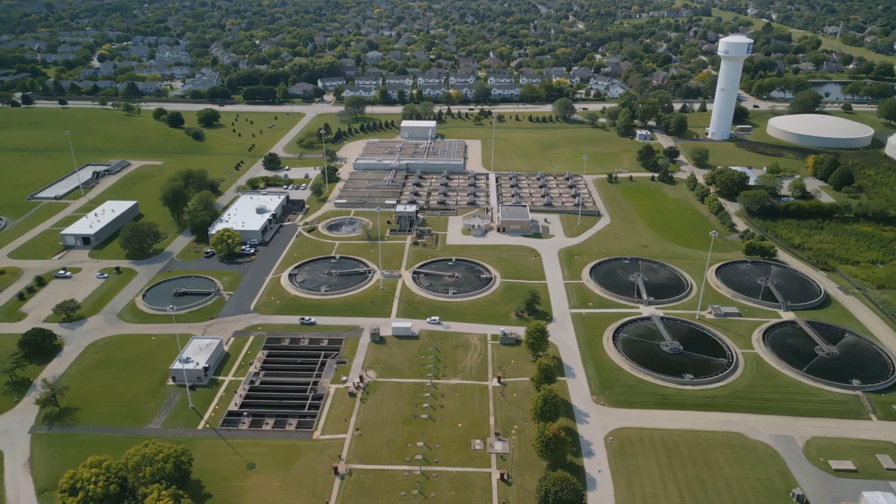Furthermore, by cleaning polluted runoff before it enters our rivers, SuDS helps to reduce the burden on our municipal water treatment plants. Cleaner rivers mean lower costs associated with treating water for drinking supplies downstream. It also helps local authorities and water companies meet increasingly stringent environmental water quality targets, which avoids potential fines and the high cost of retrofitting large-scale treatment solutions to deal with diffuse urban pollution.

The natural filtration services provided by swales, rain gardens and wetlands are a perfect example of ecosystem services, where nature does a complex job for us for free if we only give it the space to do so. The amenity and biodiversity benefits, while sometimes harder to put a price on, are equally profound. Green spaces are known to improve public health, both physical and mental, reducing stress and encouraging active lifestyles. This in turn can lead to reduced healthcare costs for the wider community.

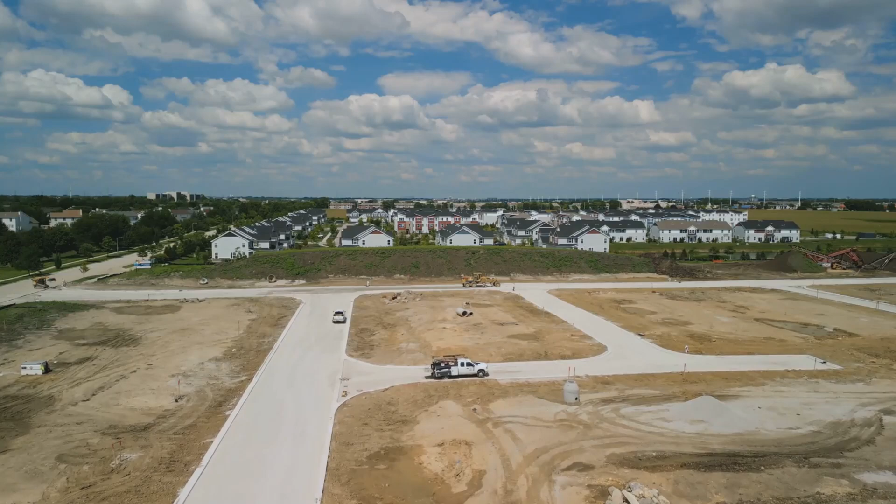The aesthetic improvement of an area, replacing grey infrastructure with green, has been consistently shown to increase property values, providing a direct financial uplift for homeowners and developers. These beautifully landscaped, biodiverse spaces create more desirable places to live, attracting investment and fostering a stronger sense of community pride and ownership. Ultimately, the value proposition of SuDS is about building resilience.

In an era of climate uncertainty, these systems make our cities safer, more adaptable and better prepared for the future. They diversify our approach to water management, moving away from a single point of failure, the capacity of a pipe, towards a decentralized network that can gracefully handle stress. This resilience has immense economic value, protecting local economies from the disruption of extreme weather and creating stable, attractive environments for businesses to invest in. SuDS are not a cost, they are a multifaceted investment in a safer, healthier and more prosperous future.

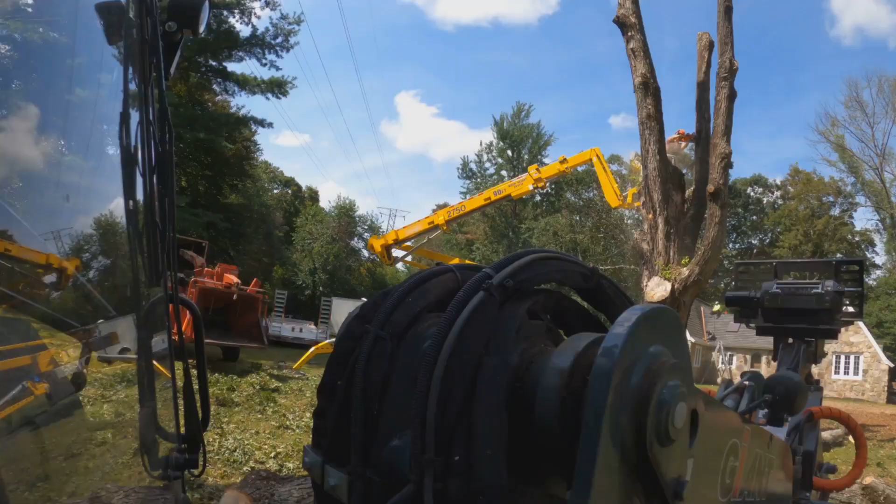Like any garden, a sustainable drainage system requires care to keep it healthy. Maintenance is typically straightforward, low cost, and less disruptive than dealing with failed conventional systems. A well-thought-out maintenance plan ensures the system delivers on its promises. Regular inspection allows for small issues to be addressed early, safeguarding long-term performance.

Teams should check for blockages, erosion, and standing water. Vegetation health is critical, dead plants should be replaced, and weeds removed. Test infiltration rates every few years, and take remedial actions if performance declines. By designing for maintenance, we create environmentally and operationally sustainable systems.

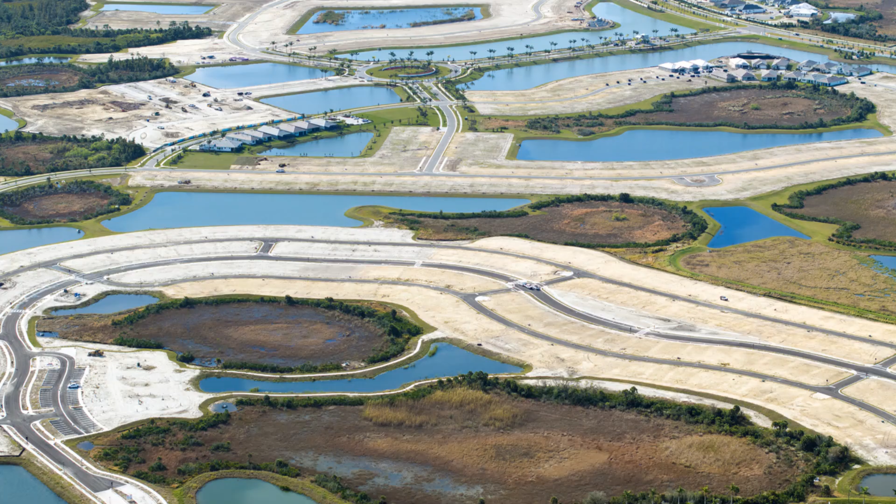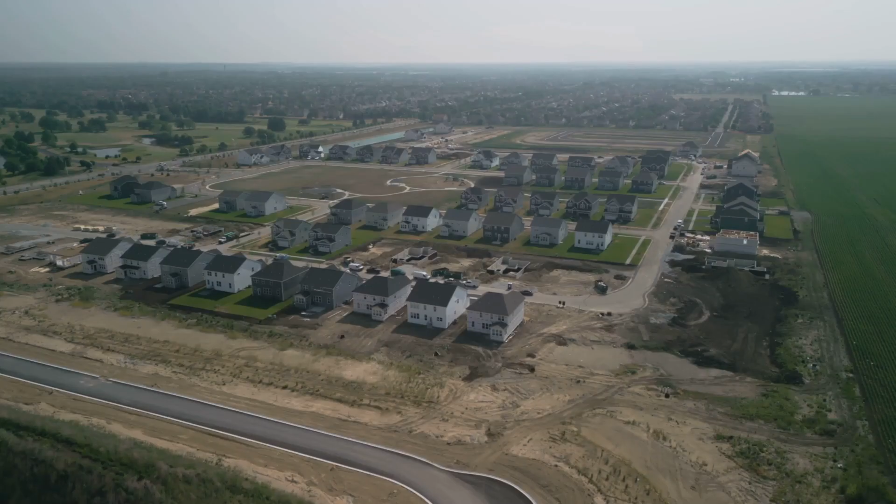Lamb Drove in Cambourne, Cambridgeshire, completed in the mid-2000s, demonstrates how SuDS can be retrofitted into an existing housing development to solve drainage problems. Rather than installing bigger pipes, a comprehensive SuDS approach was embraced. The transformation involved integrating permeable paving, rain gardens, and linear swales. The SuDS scheme reduced runoff by 80%, solving flooding issues and improving water quality. Lamb Drove proves SuDS are a practical, affordable solution for resilient communities.

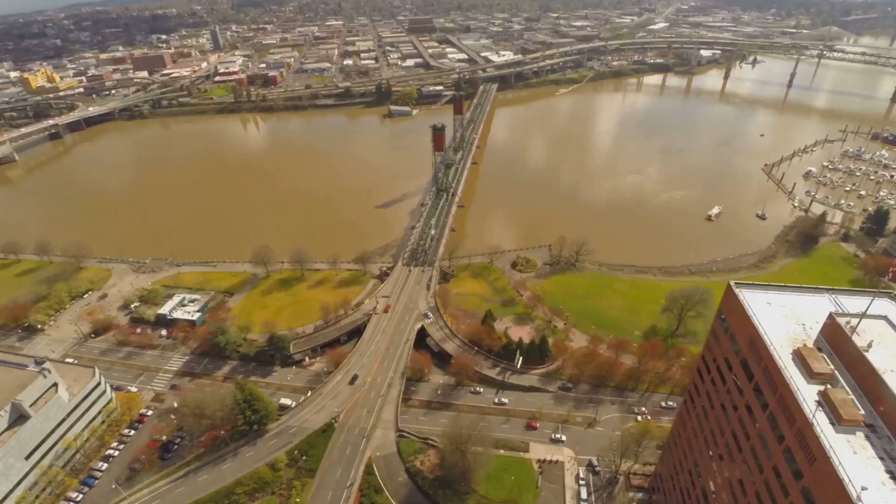Portland, Oregon is a global leader in urban SuDS, particularly its Green Streets program. Faced with sewer overflow challenges, Portland chose surface rainwater management over costly underground tunnels. Green Streets retrofits rights-of-way with rain gardens. These capture gutter stormwater, filtering it through soil and plants. This reduces sewer overflows, improving river health and neighborhood livability. Portland's success shows how citywide SuDS policies can create resilient, green urban environments.

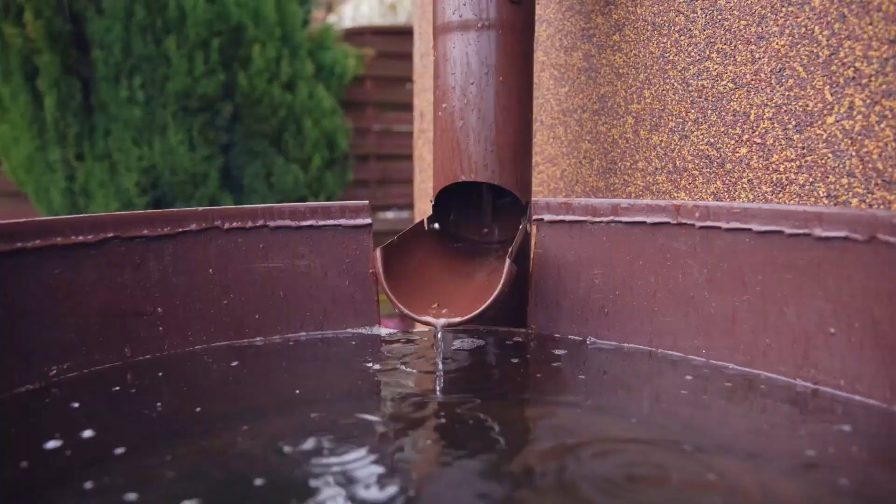We have traveled from the flaws of our old concrete-bound drainage philosophy to nature-inspired solutions for a greener, safer future. SuDS asks us to stop seeing rainfall as an enemy and instead view it as a vital resource. It's a move towards a harmonious partnership with nature. They are the building blocks of better places, landscapes richer in biodiversity, more pleasing to the eye and more resilient to climate change.

The real power of SuDS lies in its holistic vision. This integrated thinking is what our future demands. We need solutions that solve multiple problems at once. It's about the kind of world we want to build and live in, a more resilient, more beautiful and more water-wise future.